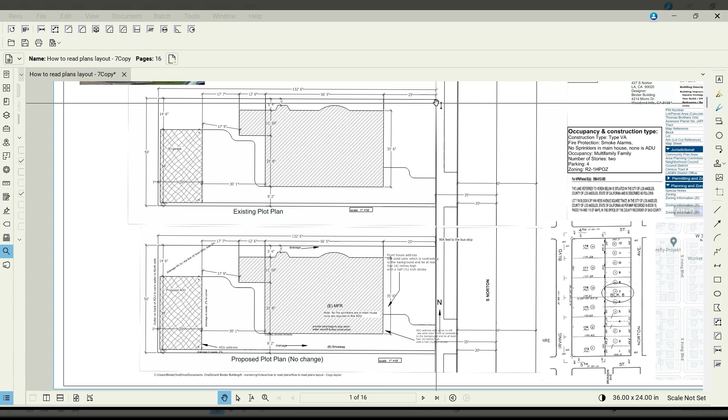In this plan, you can see that here's the street. This is the existing plot plan right here, the existing house, and a garage. They're going to convert the garage into an ADU. So right here, we have the proposed plot plan where there's going to be an ADU down here. Here's the same house, nothing's changed, and the driveway coming back towards it.

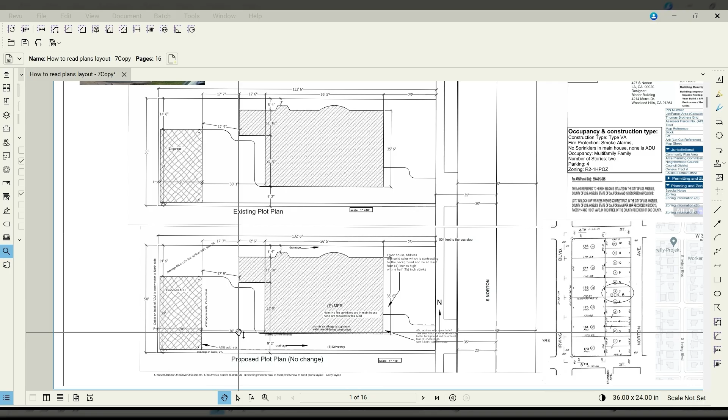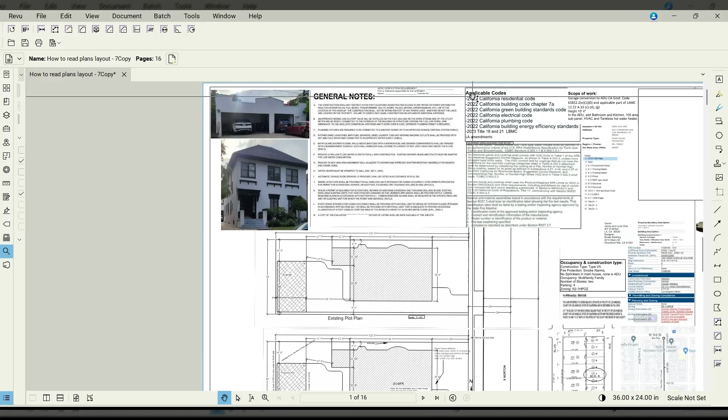Also on this page, you can see where the house is located on the block and a map showing how far the bus stop is. This shows the codes that this plan was drawn under, the scope of work. All the pages that you're going to find in this set of plans are right here.

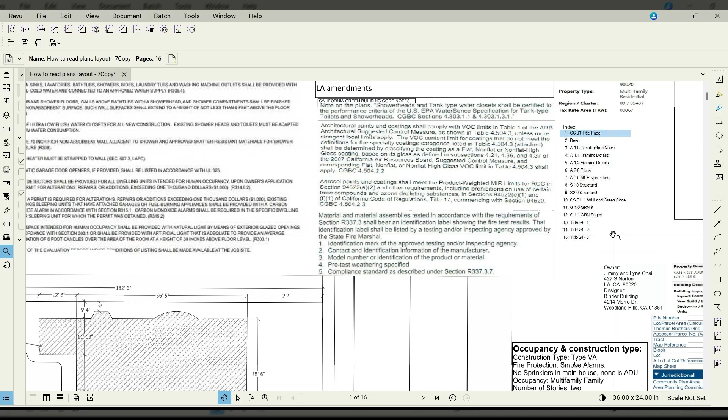Over here, we have the customer's name, the company name that drew it, and the page identification. Here's what the house currently looks like and the existing garage. And then we have some general notes.

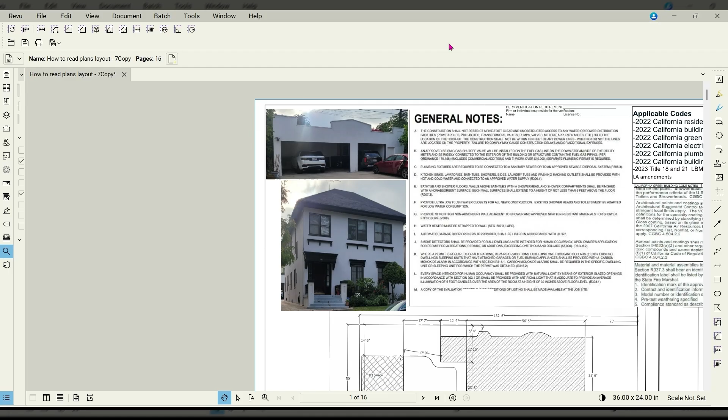Next, we're going to look at the plans page. A2.0 shows me what was the existing garage and its roof and the plan for the new ADU. And here is the plan for the electrical.

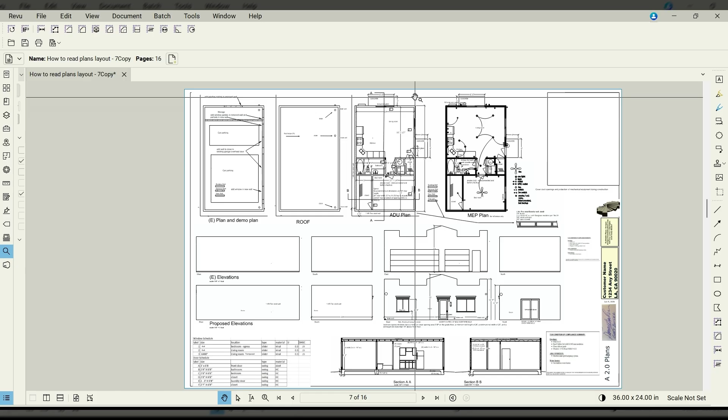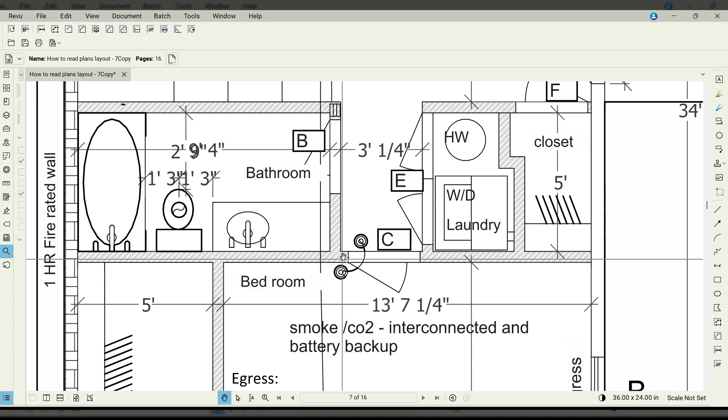So if we zoom in on the plan, we can see the front door is right here. There's the kitchen and living room. And you come down a short hallway to the bathroom and into the bedroom, and here's the closet. This is what a door looks like. It's the door and then its path of swing.

Here's a window right here. It's a sliding window and it has egress in it, meaning if there's a fire, someone can crawl out the window. There's a laundry room here and a water heater, hot water heater, and a closet.

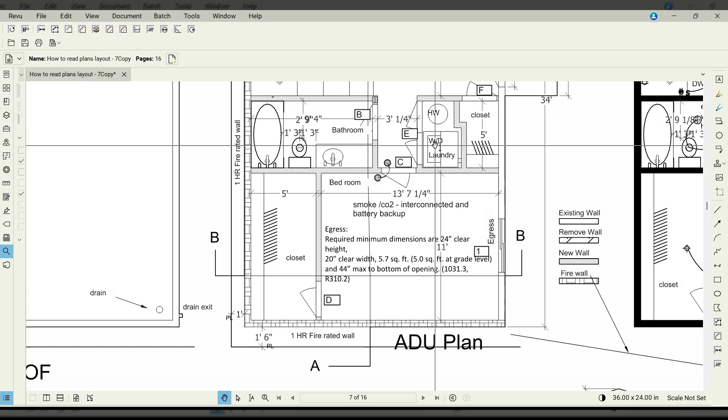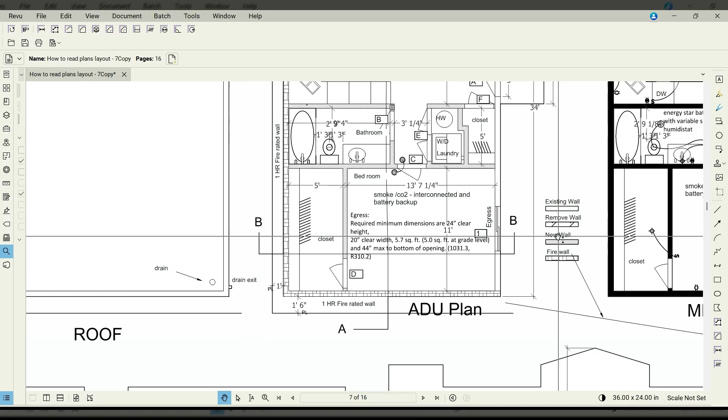Right here is a legend that tells me what the various walls are. This exterior wall is a fire rated wall, meaning it's a 1 hour fire rated wall. It needs to be that way because it's close to the lot line. This is a new wall we're adding. You can see it here and around here and over here. And we have to remove some walls and an existing wall.

If we look at the electrical, we see there's a switch and a fan. There's a switch and a light. There's a switch to a bunch of recessed lights. And it's a 3-way switch, so you can turn it on here and then turn it off as you leave out the front door.

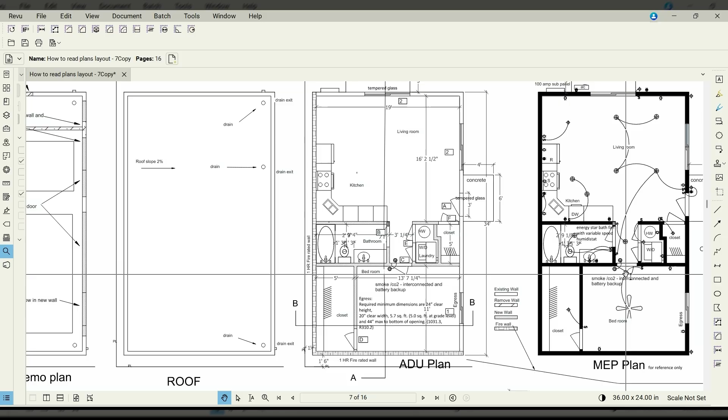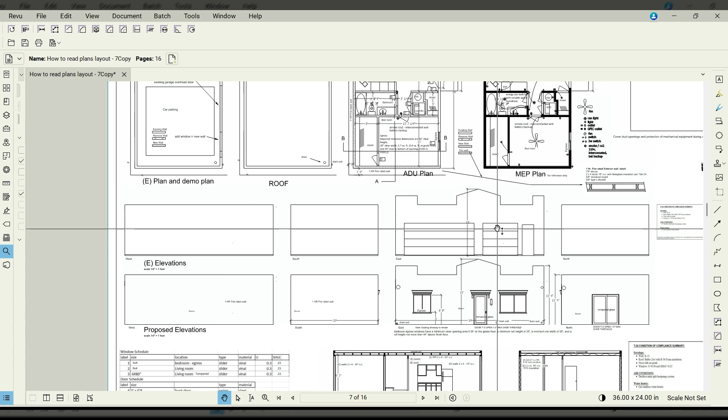We also see on here the elevations, as if you're standing straight on looking at the building. So here's the front of the building. This is the way we propose it. This one is existing. So all this top row is existing, and these are what we propose.

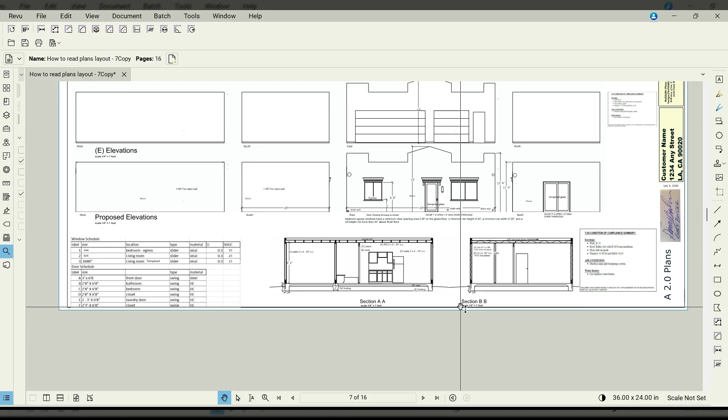Here we have a section drawing so that if you just cut the building and look into it, you can see the ceiling joists, the walls, things like that. And if you look at it, you have section AA and section BB. We go back up to the plans and you can see right here, I've got A and A. That tells me that the section AA is looking through it this way, and section BB is looking this way.

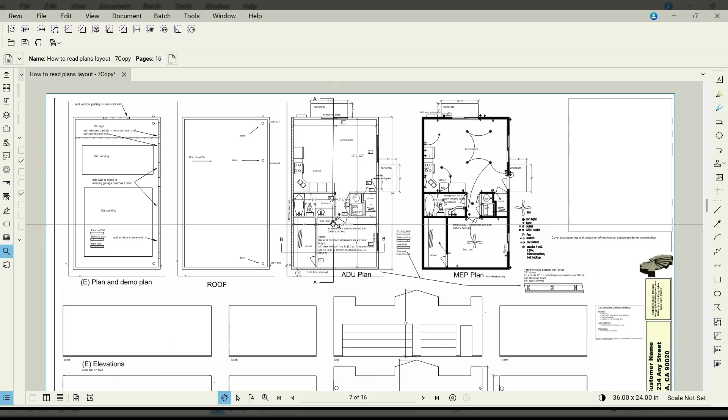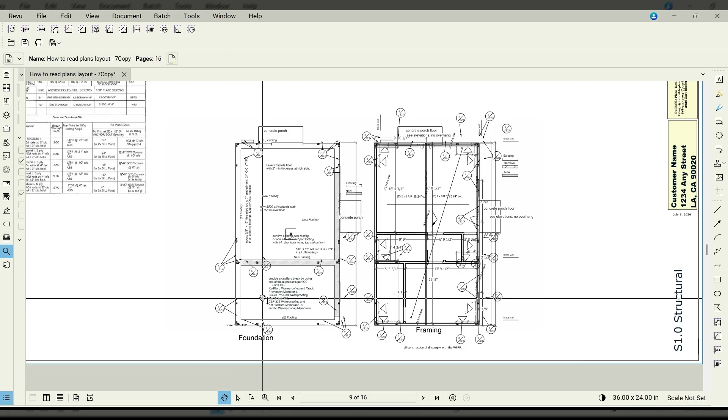Next, I like to go to the structural page, S1.0 structural, as you can see right here. And this tells me what the foundation is going to be like and what the framing is going to be like. So let's look at the foundation first. There's already a concrete slab there because it was a garage, but this tells me how to waterproof it, keep the moisture out of the new ADU.

Because of earthquakes, I need to have shear wall consideration, which basically means if the ground starts shaking from an earthquake, you want the building not to rack and move back and forth. You want it to stay together as a solid entity. So the way they do that is they tie the walls to the foundations with hangers and hardware, and they use structural plywood to stop it from being able to rack.

Kind of like if you were to jump on a chair, if the chair wobbled and the legs fell out from under you, that would be a problem. But if you have the legs strong enough, it can take the impact of you jumping on it.

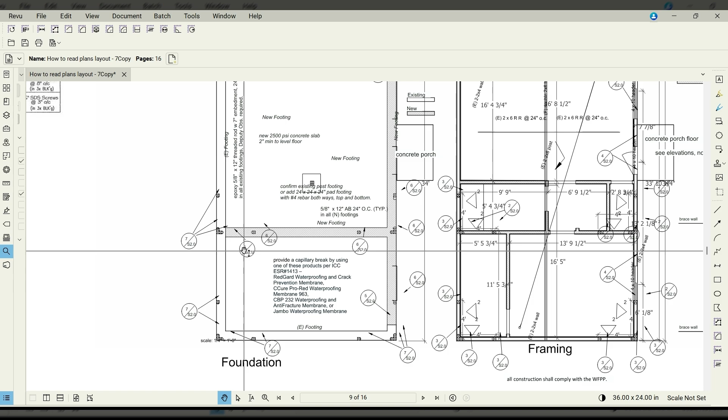On these foundation plans are callouts. This one right here is page S2.0, detail 7. We have detail 5, detail 6. Here we are on S2.0, and we look for detail 5. And that's telling me how to join two pieces of foundation together. And detail 6 is showing me how to install the hold downs, and same with 7.

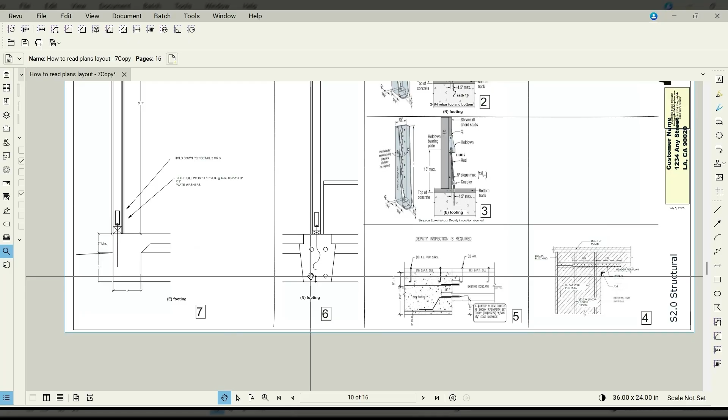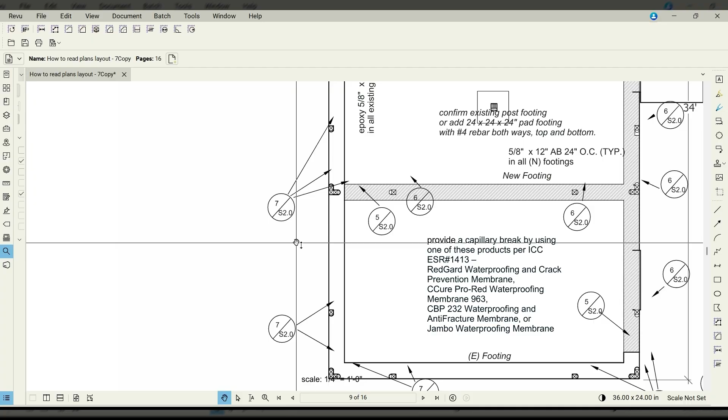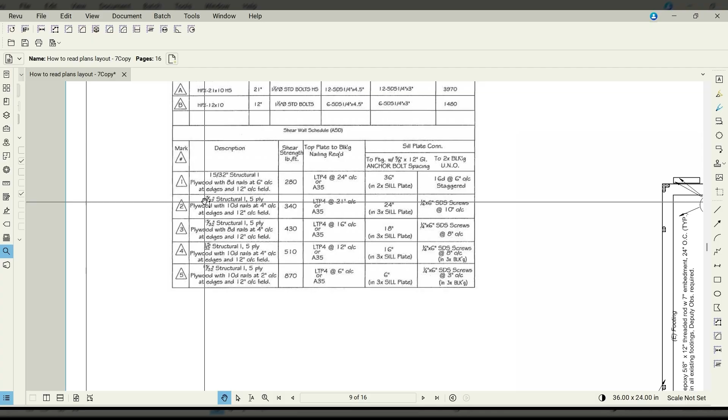For the shear value, going back to the framing plan, we can see this triangle tells me it's a shear wall. It's a 4-foot long shear wall. It's made up of a number 2 shear wall detail. And somewhere on this page is going to be a shear wall detail. And here it is right here. Shear wall schedule, number 2. They want a

15/32 structural 5-ply plywood with number 10D nails at 4-inch on center at edges and 12-inch on center in the field. So of a 4x8 sheet of plywood, I need to put nails every 4 inches all around the edge of the plywood, and in between where it touches on studs every 16 inches, those nails need to be 12 inches apart. The sill plate is a 3x6 sill plate connected to the foundation every 24 inches with an anchor bolt.

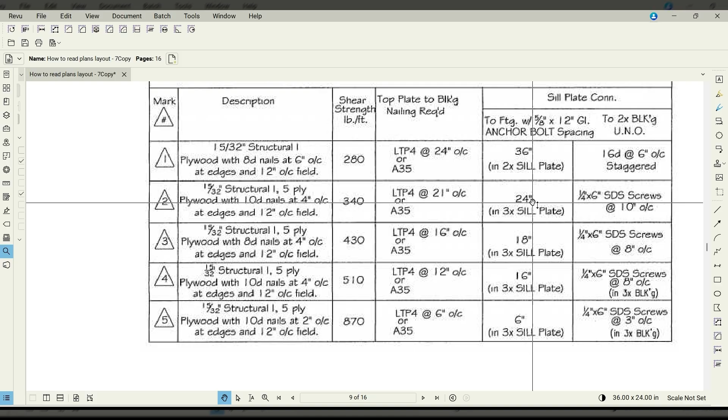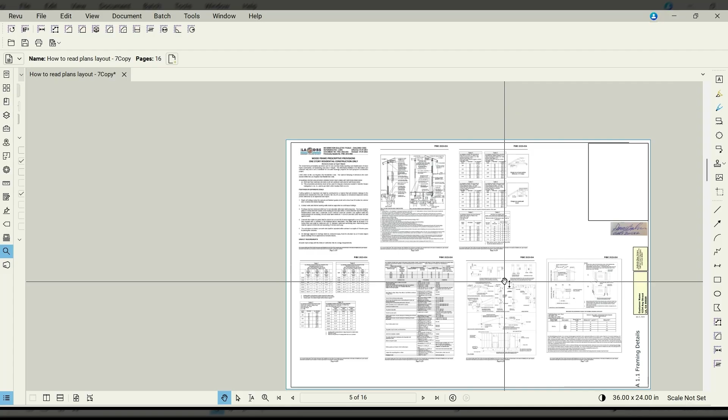As you can see, there's a lot of verbiage in the plan also. There's general notes, and there's California Building Code notes, fastening schedules. All of the information that you need to build the house is in these plans at some point. And it's important that you read the plans, but more important that your contractor reads the plans and your framer reads the plans so they understand exactly what they have to do.

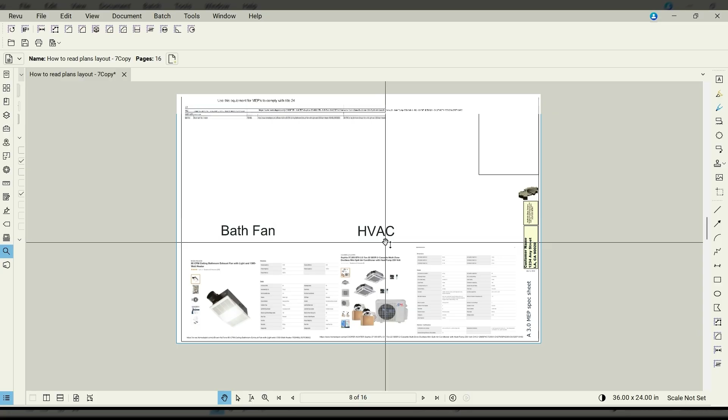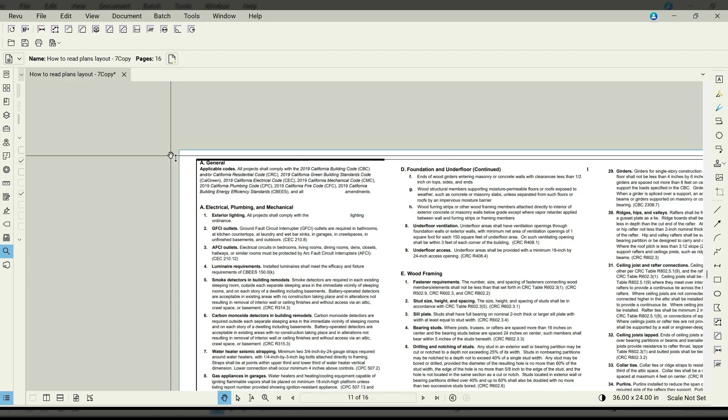This plan also shows you what the air conditioning system is and the bathroom fan, more information about code requirements and fastening requirements, all part of how to build the house. And a builder, as he goes through these, is flipping from page to page, trying to get the clear picture of exactly what it is he's going to be building.

Blueprints aren't magic. They're a book, and they're telling a story. They're communicating between the designer, the contractor, the building department, and you, the owner. The better you understand what's on these pages, the fewer surprises you get during your project.